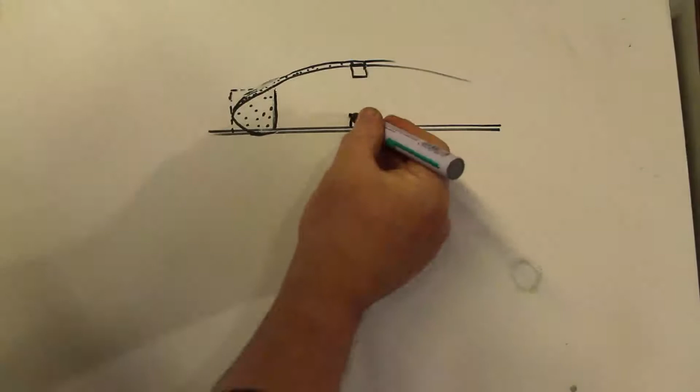Here we have a diagram of what is shown on the plans. Here's the rib with the spar. Of course there should be another one here, like that. Now,

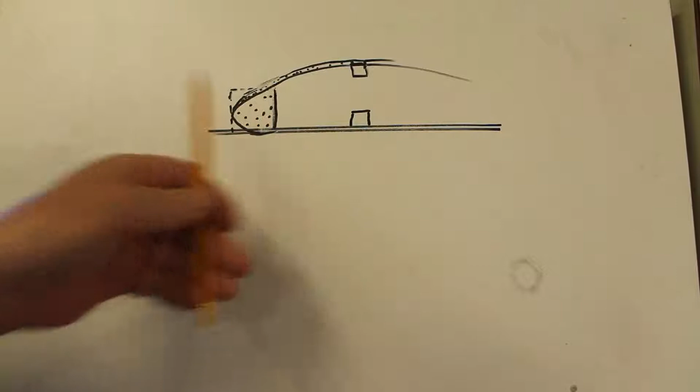to get the leading edge, the plans show us to glue a 12 by 12 block of balsa wood to the front of the ribs, and then we form it to the shape of the wing, and then glue down this upper skin here. This is not a very good solution.

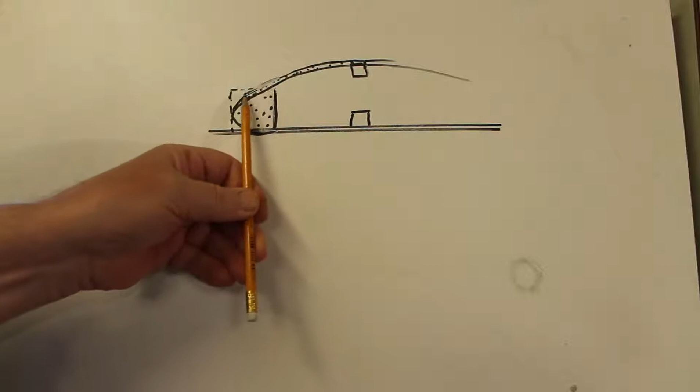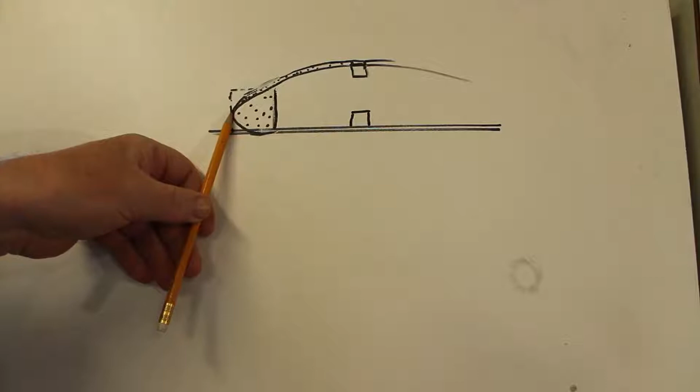To begin with, forming a huge block of wood like this is problematic, mostly because when it's glued in front of 1.5mm ribs like this, it will result in some ribs being broken. So another thing is that here we have a joint that will always be seen. There will always be a ridge here, and it might even come loose. So we're going to do something else.

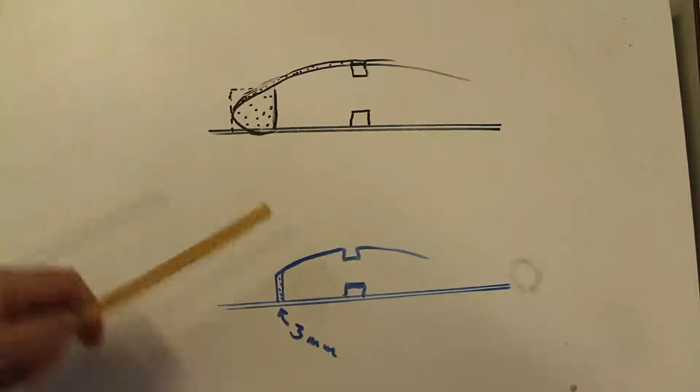Now here's what we're going to do. Here we have the rib, and to the front of it we glue a 3mm piece of wood, and it will be just high enough to clear the ribs, and then we will form it down to the shape of the ribs here in the top. So instead of 12mm, we're going to put 3mm.

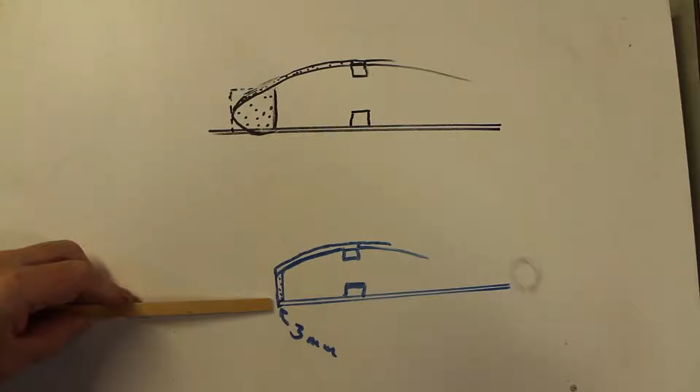What we then do is we glue the upper skin on here, and we trim it in flush with this 3mm sheet of balsa, and we do the same with the lower skin. So here we have both the skins trimmed to this false leading edge.

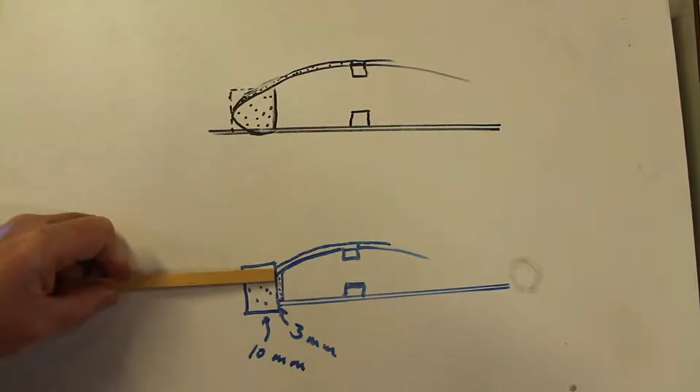Next we take a 10mm piece of balsa, high enough to cover the leading edge, and we glue it to the leading edge of the wing. Then we get a very strong glue joint on here on the 3mm sheet, and on the sheeting both top and bottom, so that this will be enormously strong.

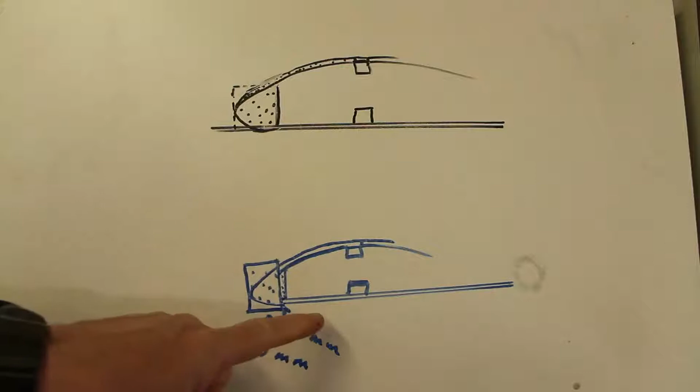Then we form the leading edge from this 10mm piece of wood, and this is very easy because we have both the sheeting on the top and the bottom, and this enormously strong glue joint. And there we have then the leading edge of the wing, much stronger than before.

Here I've got 3mm balsa, according to the changes I'm going to make, and it's best to just pin it down like this lightly, and then glue it with some thin CA glue. Now this is firmly stuck on, and I can take the pins away.

Now I have to make this curve carry on down onto the 3mm balsa wood. This is best done with something like a balsa plane. You can do it with sandpaper, but this is quicker.

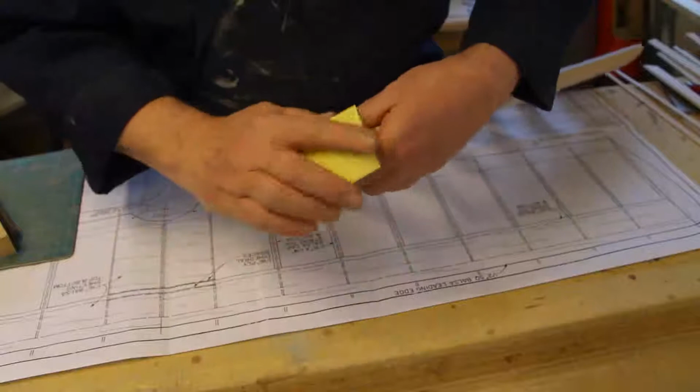Notice that the wingtip has taken on the curve of the rib, because it's cut at a 45-degree angle here. It's a triangle. So when we cut it along the rib, we duplicate the curve of the rib. Really clever.

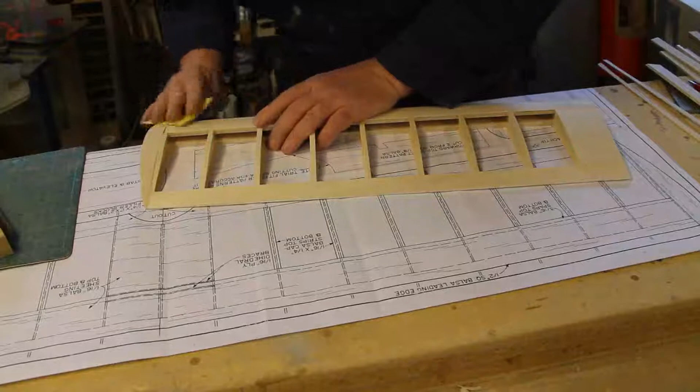Okay, now here we are, nearly finished. I just have to sand this wingtip just a little bit. I've got some 240 grit paper and just lightly sanding over it, just making it ready for covering with plastic.

There. So now we just have to make the other wing. I'm not going to do that in camera, I'm just going to do it off camera, and when I've finished it I'll call you back.